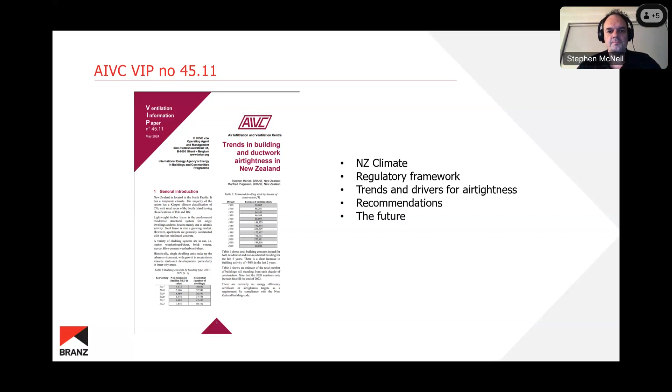Okay, so to give you an idea of the climate in New Zealand. We're located just southeast of Australia, and it's predominantly Köppen Cfb climate, though parts of the South Island do get into the colder Dfb in a few areas. So what that means is we have quite mild seasonal temperature swings, but our climate is reasonably humid.

And some of those colder areas in the south, for example, that I was talking about in the Dfb kind of climate classification, they're about half the absolute humidity of what we get in parts of the North Island. So there's some particular challenges we have when it comes to dilution ventilation, and that kind of plays out in some of the things you'll see as we go through tonight.

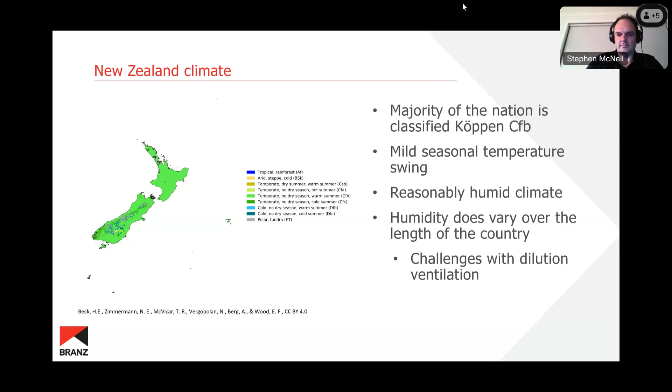Next slide. Okay, so compliance. What does compliance look like in the context of New Zealand? Well, we don't actually have a regulation for air tightness. So we have a performance-based building code, and I've borrowed this image here from the regulator, where it lays out the structure of that. So we have a Building Act which was passed by Parliament, which is then underpinned by a building code, which creates a set of objectives and functional requirements that buildings need to meet and performance criteria.

And then the next part of that is the compliance pathway. How do you demonstrate that your building meets these requirements of the building code? So that next layer down in the pyramid there, we're talking about alternative solutions, or verification methods, or acceptable solutions. There's some of the pathways you can use to demonstrate compliance of your building with the building code.

So there's a few clauses that actually are quite closely related to air tightness. So obviously there's energy efficiency, but we also have our ventilation clause, the G4 there you can see on the left. Indoor moisture is a particularly challenging one given our humid climate and the fact that we don't necessarily heat our homes that well. And then B2 durability is also another concern.

Obviously, if we have a building that is too air leaky and there's a lot of moisture passing through those air leaks into vulnerable spaces of the building, there's the opportunity for that moisture to condense and end up causing a whole raft of mold and decay and all those kind of issues. So that's obviously something that we're very keen to avoid.

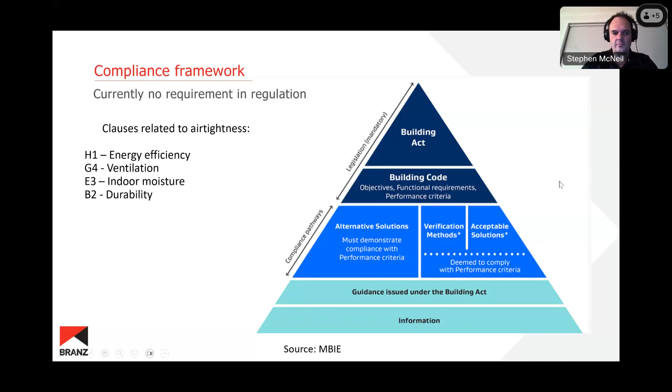So in terms of what the Building Code says there about air tightness, it's literally those three words there at H1.3.1b. So a building envelope has to try and limit uncontrollable airflow. Now, in the entirety of the acceptable solutions and verification methods, there is no definition of what constitutes uncontrollable airflow at present.

Though there is a comment in the latest edition of the acceptable solution for the energy efficiency clause of the building code. And you can see that there in the lower box, number 2. So measures should be taken to limit the amount of moisture that can migrate from occupied spaces into the roof or roof space. So that primarily came about from a very, very strong trend in New Zealand to use downlights in ceiling diaphragms, and we were effectively relying on the interior lining as the air barrier.

Obviously, once you start using recessed downlights in those sort of locations, you're punching holes in your air barrier, and if the downlights themselves leak or the fitting around them leaks, that can lead to quite a significant amount of air and moisture flowing across the ceiling, and that has led to quite a few issues with moisture in roof spaces. There are other causes as well, but this was a recognition of the role that air tightness has in helping to avoid some of these issues.

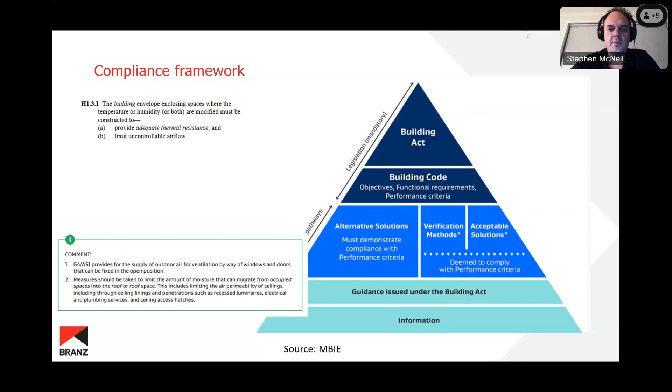Okay, so let's dive a little bit into what we actually have in New Zealand at present when it comes to air tightness. So we've got a reasonable air tightness database that goes back to the early days when Mark Bassett was involved with the AIVC. So we've got a database of several hundred buildings, which is just being collected as part of research projects. Since we don't have a large air tightness testing industry, that's what we've had to rely on up until now.

Although we do see an increase in the numbers of testers in New Zealand, mainly driven by people's membership to voluntary schemes. But I'll quickly run through the trends over the decades and talk through the changes to our building stock that have led to these changes. So these graphs are just a histogram of the makeup of our database for the different ages of buildings. The left-hand side of the plot is the percentage of the sample in that group that sit in these individual little buckets of air tightness.

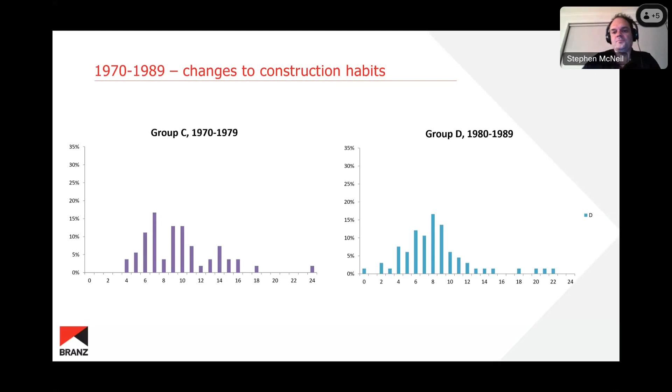And in that period from the early 1990s through to about 2005, we were getting into the thick of some of those leaky building issues that I mentioned earlier, but it also coincided with trends to plaster cornices being used and different methods of lining and detailing the interior linings of buildings. And that tended to create these more airtight structures by default, because the house buying public were demanding higher levels of finish quality. That high level of finish quality flowed through to the kind of result that we were getting.

The other thing that I probably forgot to mention was that around the late 70s, probably mid 70s actually, we were starting to see a lot more concrete slab on grade construction, and that's really flowing through into these results here. So all of a sudden, we may have had a situation where we've replaced that strip flooring with sheet flooring, and now all of a sudden we have slab on grade. So that's effectively impermeable in the center of the building, unless you've got a particularly interesting slab. But it does mean that we've lost a lot of that leakage opportunity. So it's a good thing from an airtightness perspective.

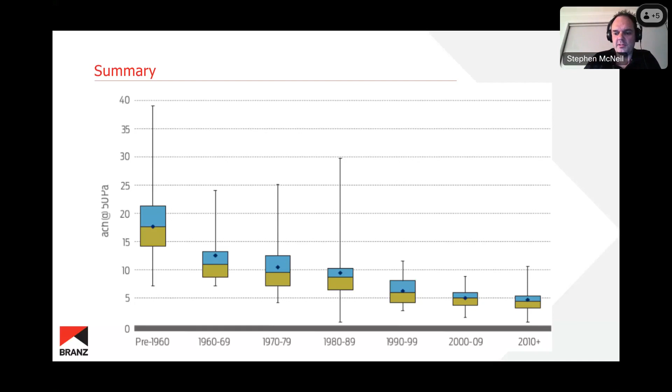So all of those slides are kind of summarized in this chart here that covers off most of our database up until the present day. So you can see the box and whisker plot showing the extremes, and then the shifting of the means and distribution of that in the two quartiles in the center there. So it's been quite a steady bit of progress, though there are some challenges that we have.

So in terms of recommendations, BRANZ as a whole, we have a blanket recommendation out there of ideally trying to achieve at least something below 3 air changes at 50 pascals, backed up with including mechanical ventilation. The reason for that is we've done quite a bit of research work looking at the typical leakage pathways in your average building. So we have a few test buildings on site where we've effectively gone through and documented, as we've made them more airtight, where the different leakage opportunities are.

One of the buildings, for example, started off at 14 at 50 pascals, and we got it down to, I think it was 3 or 4, quite easily. But we documented all the different things we did. So there are a number of quite simple measures that we have been encouraging industry to adopt. So that would be things like sealing bottom plate junctions to floor slabs as being a quite important one,

and other really simple ones, like there's a common habit of recessing the edge of the lip of a bathtub into an external wall, or showers or things like that. And just a simple thing like fitting a lining behind that before you go and do that recessing, or building it out slightly and creating an air barrier at that point before you fit the bathtub. Because those quite large holes are quite significant leaks, but they're very, very easy to fix if you do it at the right time with quite simple guidance.

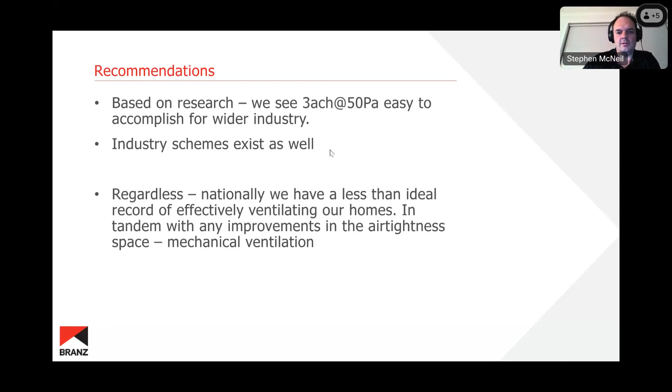Let's jump to the next slide. Yeah, so this kind of reiterates the statements I was making before. Simple, affordable changes to current building methods should get buildings below 3 at 50 quite easily. One of the other reasons why we've got 3 as a pragmatic target is we've done quite a lot of work with gas tracer measurements and coheating measurements in some of our test buildings. And what we've seen, particularly in our pretty mild climate, is that there is a bit of diminishing returns.

So although you can save more energy going down to 2 or 1 or even getting down to sort of PH kind of levels of 0.6, there are other bits of the building envelope that are more impactful when it comes to improvements. Not to say that aiming for better is bad, and I don't think it is. It's just the case of 3 is a sensible, pragmatic number that can get the most people starting to do something. I think what we find is if we set something to be too high a limit for industry to adapt to, it tends to turn people off. So you have to start them in that journey and progressively improve it.

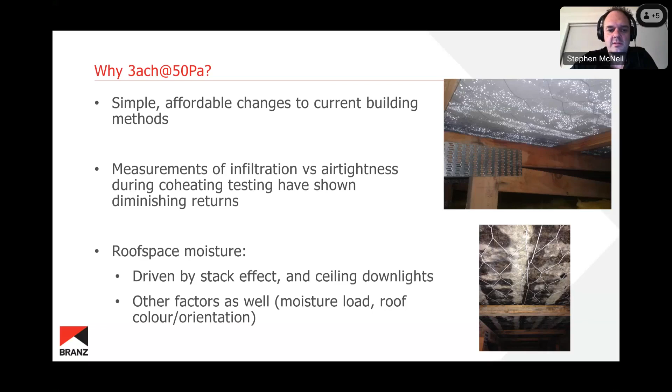And the main reason for that is that if we're using a permeability limit, it becomes a much easier task to assess hygrothermal risk with tools like WUFI. So we can look at the air permeability of the wall assembly as part of that equation. And obviously we can simulate an air leak into an assembly and say, right, well, how likely is that to cause a particular problem? So it becomes quite an easy thing for us to justify saying, well, we need to just pick a particular permeability limit based on the results of some hygrothermal modeling. Because of the diminishing returns we see from the energy perspective, it's going to be a much more appealing thing for industry to use airtightness as a means to deal with the risk as opposed to energy cost.